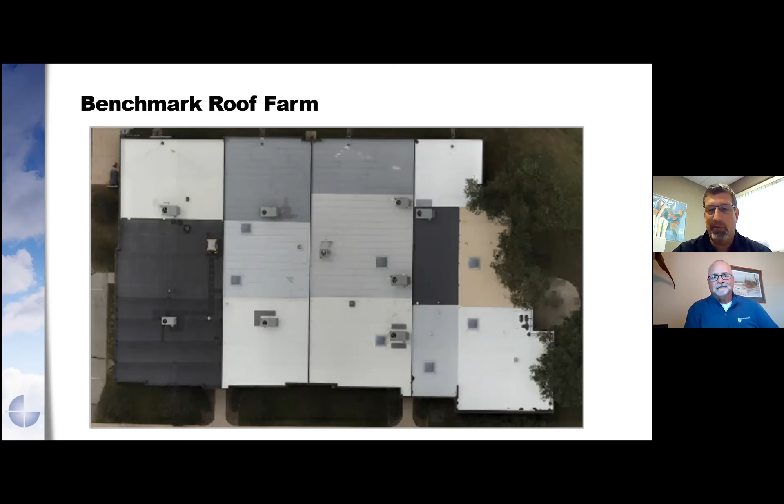So let's touch base on the webinar. We're going to focus on three things: identifying some gaps in your roof evaluation, design, and quality assurance programs for food processing facilities; strategies to justify repair and replacement budgets; and reducing risk through implementation of a roof management program. We'll share a case study, and then we'll have some Q&A.

Before we step forward, we're going to have our first poll question: have you experienced any unplanned and/or costly plant production disruptions due to roof issues? The poll question should have popped up on your screen—it's pretty simple, please answer yes or no. We'll give you a little bit of time to do that, and then we will close it and touch base on that a little bit.

So as we look at the results, almost 80% of you have had some sort of unplanned or costly plant production disruption. And that is a painful situation to be in, and not an uncommon one. We see it quite often, so hopefully we will provide some information today that can help you put plans in place to reduce the risk of those things happening.

As we work in this industry and read headlines in the morning, imagine tomorrow morning if you woke up and had a headline: leaky roof blamed for tainted product, contamination results in product recall, $160 million in lost sales and 30% reduction in stock price. Those are real headlines that have taken place in the industry. The impact the roof can have is tremendous, and we want to reduce that risk.

So the first thing we're going to take a look at is things taking place in the roofing industry that might have an impact on how you're managing your roofs and some of the outcomes. The roofing industry is a fairly large industry, a $150 billion industry. There's about 1 million workers and 55,000 contractors. I think the largest commercial roofing contractor today doesn't even make up 1% of the industry, so it's very fragmented. Some of the issues they're facing include supply chain, which is an issue you're all dealing with right now, impacting what materials we can get, what systems we can specify, and a lot of things in the roofing industry.

But the real big issues, I think, are the next three. Number one is worker shortages. We're seeing it across not just the roofing industry, but in this case the roofing industry is having a difficult time finding workers - not just workers with skills who know how to install and want to work in that industry. It's been a challenge for a long time. But when you look at many roofing crews, you see a lot of folks who have probably been doing it for a long time with a lot of experience and skills. Those people are starting to retire and go away, and there's a gap to fill.

Litigation. When you look at new construction or even an existing facility, the total cost of the roof on those buildings is small compared to everything else in place. But roofs account for 50 to 65% of all construction-related litigation. Huge issue, a lot of risk associated with roofs, but it's a small cost in many cases of construction.

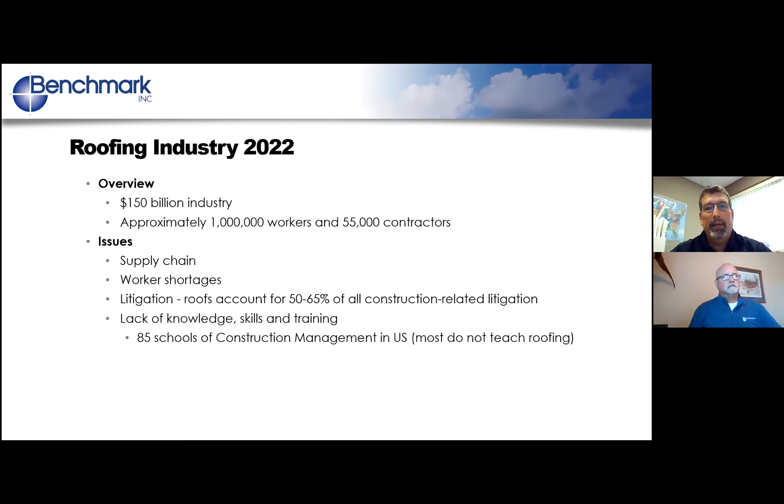So we shift from there and look at a study on roof failure. Let's talk briefly about a roof failure study. This was a study completed by RICOWI, the Roofing Industry Committee on Weather Issues. They looked at preventable and non-preventable failures when they studied these roof failures, and it's interesting when you break down the loss and the causes.

Workmanship, how the roof was installed, a preventable issue. Material, whether that's selection type or material failure, I'm not sure, but preventable. And then finally, maintenance related issues, a huge area that just gets overlooked. So it's amazing when you look at this, the majority of failures in this study could have been prevented had these areas been addressed initially during the process.

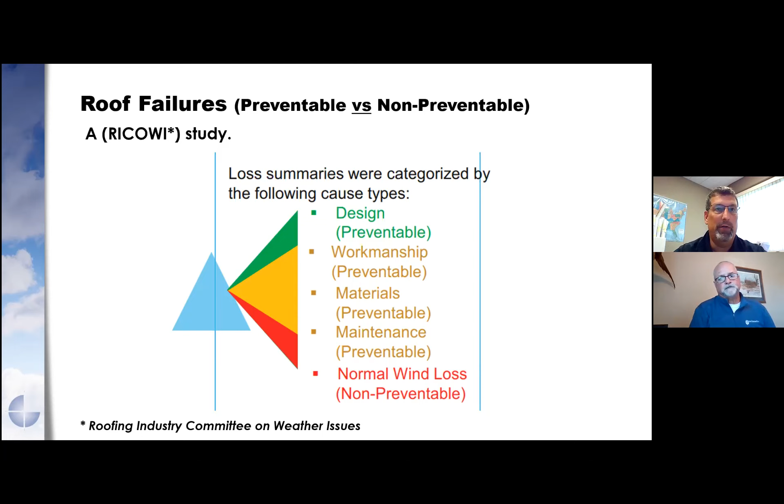So from that, we're going to go ahead and talk about food industry roofs. And as you think about roofs in general, they all face a lot of tough conditions. You know, we have wind, we have rain, hail, extreme temperatures. So it doesn't matter if you're a school or a food processing facility, all roofs have environmental conditions. But we do know the food processing industry and food industry in general has other issues you have to deal with. And I know Mike's going to make some comments. He'll jump in at some point here, but I know regulation issues create some challenges for food processing.

The activities below a roof. I'm sitting in an office building today, and I can go from my office down to the end of the building, and the conditions under the roof are not going to change. But when we start looking at the food industry, we have freezers, we have coolers, we have production areas, we have processing areas, we have warehouses, office space, conditioned, unconditioned. And so all those different activities below the roof impact how that roof is designed and how that roof is maintained. So tremendous difference in how you look at food processing roofs versus many roofs out there.

You know, if I might, Eric, I think these are really a couple of the key components here. The USDA and FDA 1997 laws really had some impact on the definition of freezers, coolers, production, and it's based on the size of the space as well as the temperatures that those areas are maintained at. So it's kind of interesting as we look at it from a roofing perspective, what happens beneath that roof area, be it a freezer or a cooler in particular, those temperatures impact how we deal with the roofing systems and the design. And we'll talk a little bit more about that later in the presentation.

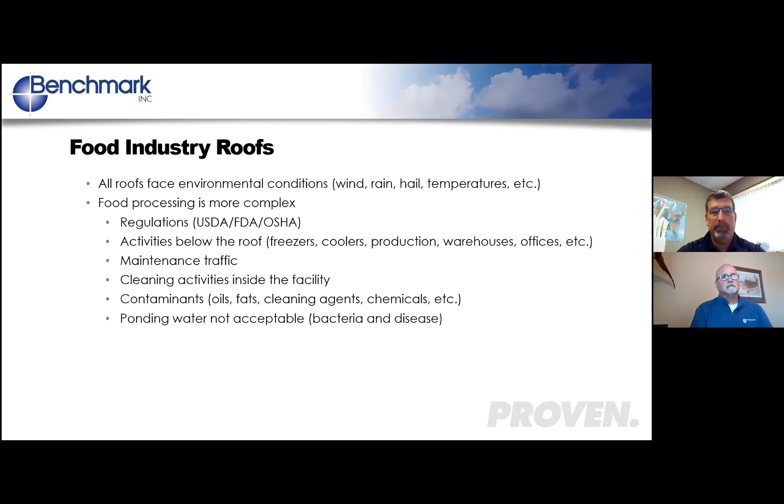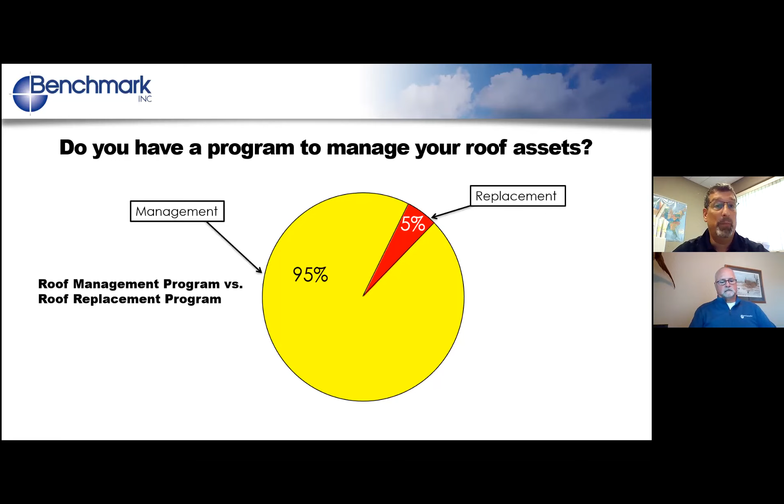But what can happen is the remaining 95% of these roofs, whether you have a replacement program or a roof management program. If we forget about the remaining 95% and don't look at repairs and maintenance or coatings or other options, we forget about the largest part of our asset. And it can create some real challenges that are very costly. And we'll see where your 5% replacement, if we don't address the other 95%, could become 6%, 7%, or 10% replacement, because those other 95% are no longer lasting 20 years and they start pushing into that replacement area. So we'll take a look at that as we go forward.

So as we think about a program, we think there are 9 areas that would make sense to evaluate and consider. And for us, it starts with goals. Do you have a goal for your roof management program? And what is that? Because when you establish the goal and understand what that is, it allows you to build the rest of the program to accomplish those goals. And we'll talk about some of those goals in just a second. Corporate guidelines. Do you have some corporate guidelines or standards that impact roof design, roof maintenance, or even quality assurance of roofs being installed? So understanding what your corporate guidelines are and developing those.

Then we start getting into a roof inventory and condition assessment. As you look at your facility or your portfolio of roofs, do you have an inventory of all your assets, and do you know the condition of those assets? Do you have that now? Number 4, a 5-year plan. We tend to think in 5-year plans. We've looked at some that are 10 years, but generally we have a pretty good idea of the progression of roofs over 5 years. When we start getting out to 10 years, it gets a little bit harder to look at performance because a lot of things can impact that. But do you have a 5-year plan that addresses repairs, maintenance, coatings, recovers, or replacements?

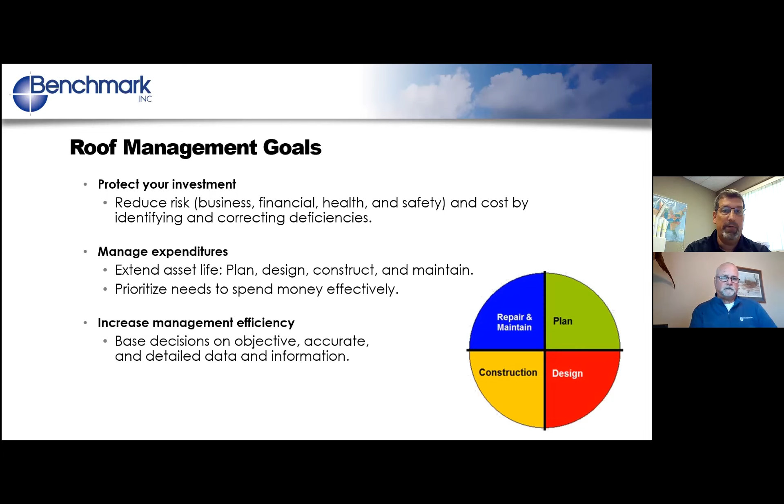So that's in big picture how we think about it. But it's really important in our mind to sit down with individuals and talk through, what do these goals look like for you? Because they can be different for each company. So as we jump into the planning phase, it starts with knowing the condition of your assets, so you can manage risk and cost, and you look at completing an inventory assessment. This allows you to prioritize budgets and ultimately take action.

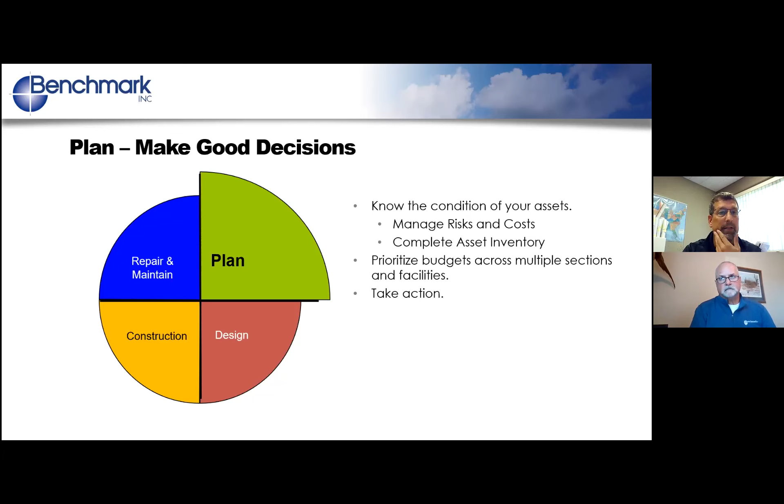So let's dig into this a little deeper. We've talked a lot about data and information. And one of the things that gets a lot of attention today, and we have a lot of clients talking about this, is the use of UAVs or drones. It's kind of a hot topic right now. And I want to talk just a little bit about this as it relates to collecting data and turning that into information that you can use.

Benchmark's been involved with UAVs for probably 6 years. We outsourced for the first 4.5, 5 years. About a year and a half ago, we purchased our own system and trained our own pilots. So we have roof consultants that are pilots flying these drones. And some things I just want to make you aware of as you consider these. You've got to get the right data for both infrared moisture scans and for RGB, just think standard images. Do you have the right systems and processes where you can collect that data accurately?

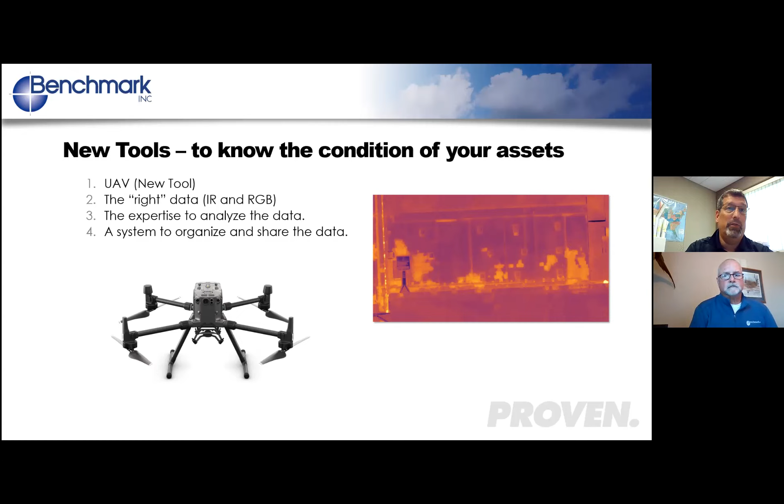Because, we can start looking at return on investment on these things, and how you get that done. But it's really important when you think about it - it's simply let's extend the life of that asset, and it's repair and maintenance that quite often will result in that.

Mike, did you have a comment on that? I do. It's interesting, Eric, that the studies NRCA has done show two factors that are probably the most critical: first, initial design, making sure you've got the design in place that incorporates materials appropriate for those roof areas impacted on your facilities. The second is that repair and maintenance piece. It's incredible the return on investment when you do a life cycle cost analysis of what the repairs and maintenance can do.

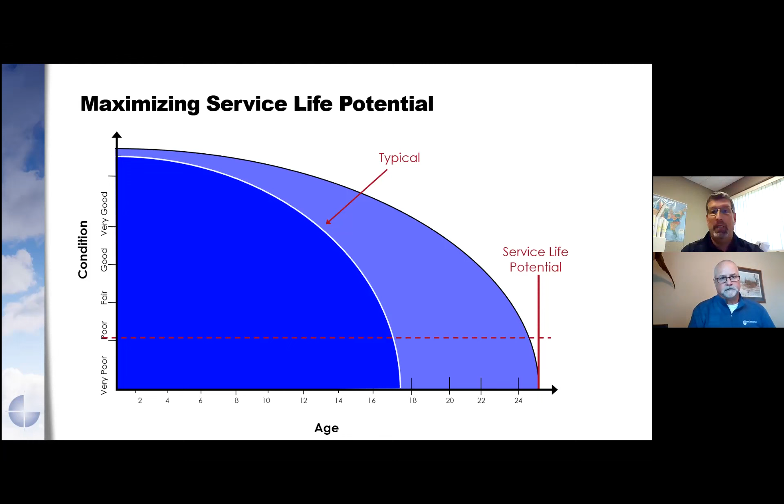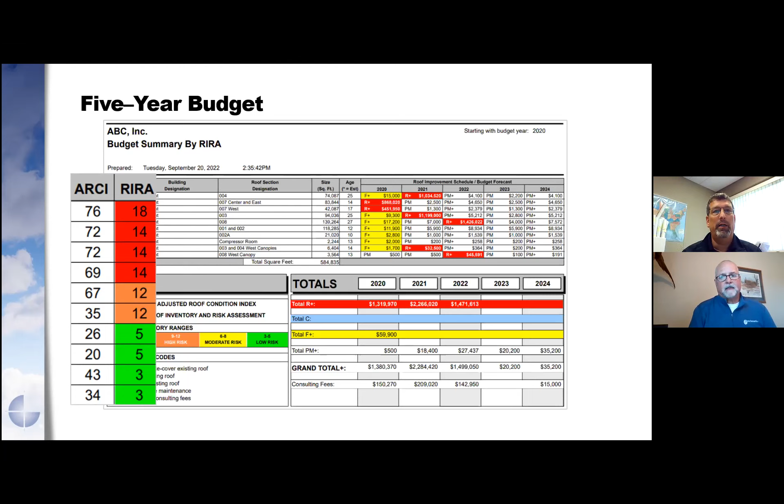But then we step over to the RIRA, which is a risk factor. It's simply red is worse, orange is a little bit better, green is good, as we look at the risk or sensitivity to moisture inside that facility. So again, when you think production area versus office, there's a higher risk of water entering a production area than an office area.

Eric, one of the interesting things with regard to food processing plants - I've got three clients we're working with - is how they approach the roof condition index versus RIRA. The roof condition index, folks, keep in mind, really is the condition of the asset above the deck. What happens below the deck is that risk piece. And it's interesting to me that of the food processing clients we're working with, how they even approach that risk factor a little bit differently.

For example, a production line, if it's beneath the roof area, is very obviously very high priority and very high risk if in fact you do have leaks that shut that line down. Whereas if you look at even a warehouse, a cold storage facility of the food processing plant, interestingly still a very high risk, but not quite as high as that production area. So you may find those falling into that orange or 12 range and so on.

Why I think this is important, folks, is that you'll have an opportunity to really evaluate - from the function beneath that roof area - it really holds a higher weight and priority based on that risk.

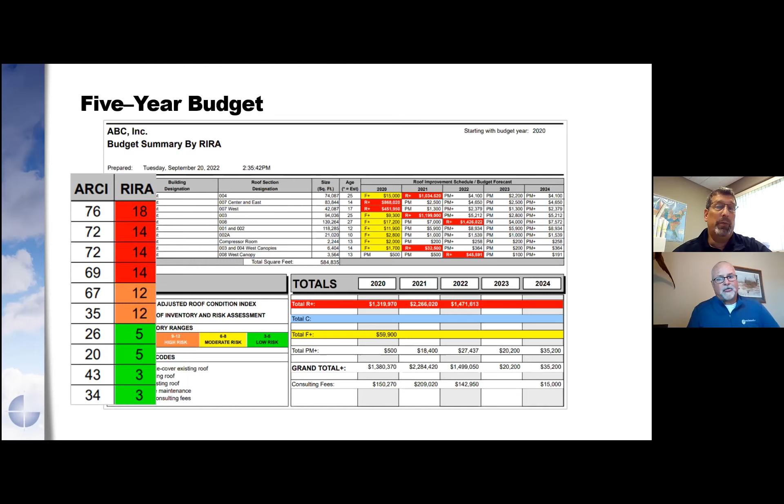As you look at the column with the yellow F, those are repair expenses, and they're $60,000. So if your budget is $35,000 for repairs, RIRA helps you determine where you spend those first $35,000, because if a roof falls under risk of green, you're probably going to focus on red and orange areas first with the first dollars you can spend.

The same goes for replacement. If you have multiple replacements that fall in the same year and you can't get the capital to replace them all, you'll probably treat some with emergency repairs, but those that are high risk would go to the top of the list as you look for funding for replacement.

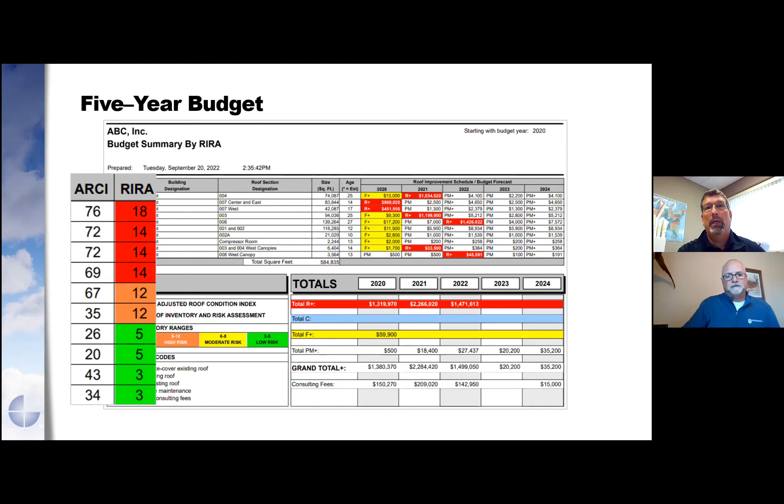It does help build the case for justifying funding when you can associate risk with condition. Exactly. And so the last slide shows, in this case, there's about $5 million in replacement, $60,000 in repairs. If those repairs are not done, the $5 million in replacement may change to $7 million or $10 million 2 and 3 years down the line.

It does help you build the case for why it's important to get those expense funds, but sometimes that can be difficult depending on how your funding structures are set up. If corporate makes all the decisions on capital and expense, it's a little easier, but sometimes corporate handles capital and the facility handles expense. At least having some insight into what happens if we don't spend this money on repair and maintenance helps, because it will impact our capital budget down the line.

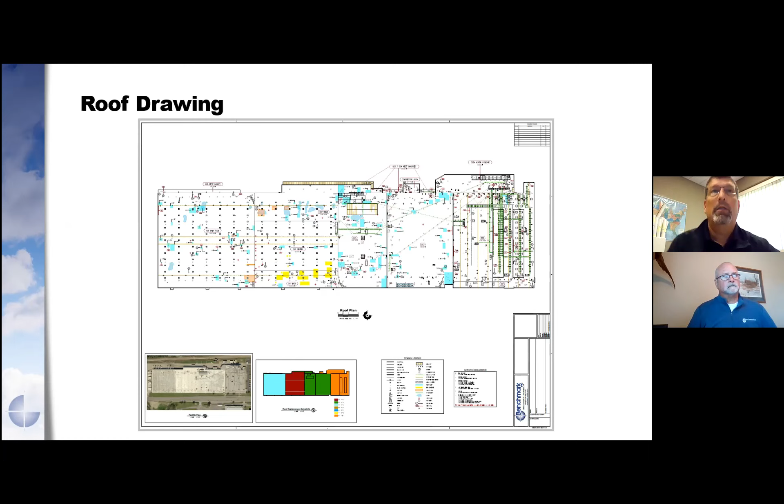It is an opportunity, when you have this information, to make some business decisions on what to do. The goal might be to take those roofs that are 6 to 10 years and shrink that from 72% down to 40%. Can we do that with aggressive repairs and maintenance? Can we do that through coatings? Can we do that through recovers? What options do we have to shrink that 6 to 10 year replacement down?

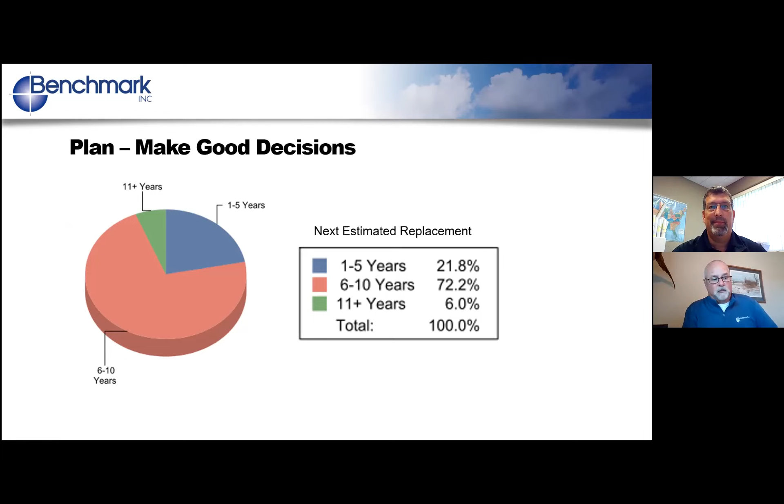So it's critical—and I'll talk a little more about this in a moment—the type of roof membrane and system you specify based on what those emissions are. That's really what we're going to look at, because if you choose the wrong system based on the emissions your plants are producing, you're going to significantly reduce the service life of that roof. Thanks, Mike.

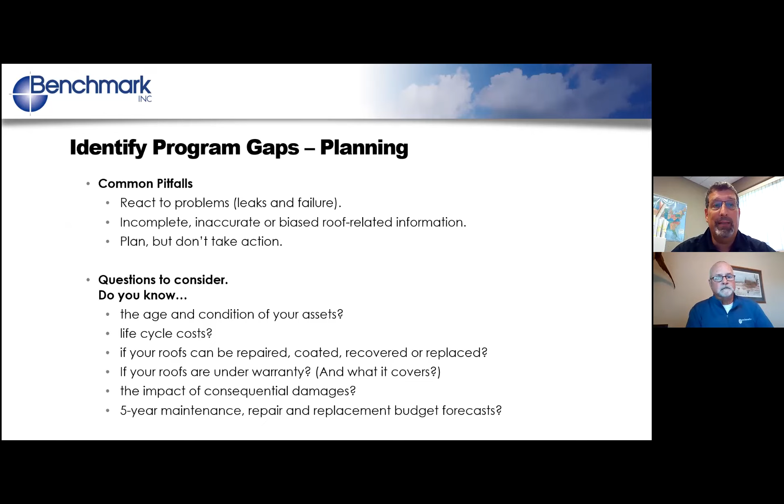So we're going to shift from the planning phase into—I'll give a quick recap on planning, sorry. We see some of the pitfalls are reacting to leaks and failure versus being proactive, having incomplete or inaccurate information to base decisions on, and planning but not taking action. I'm not going to get through the rest of those.

We're going to jump on to the next phase, and this gets into the design phase. Mike, why don't you go ahead and talk through some of this?

You bet. So what we're really looking at, the second piece of the pie here, is design, specific design criteria. We could have a 2-day seminar on this, so I'll go through it fairly quickly, touching on high points: evaluating the options available, approved contractors, materials, the bid aspects of design with detailed plans and specs. Accurate bidding reduces cost and time frame, and then budgeting and bundling regional projects. Eric talked about that earlier, the opportunities to economize.

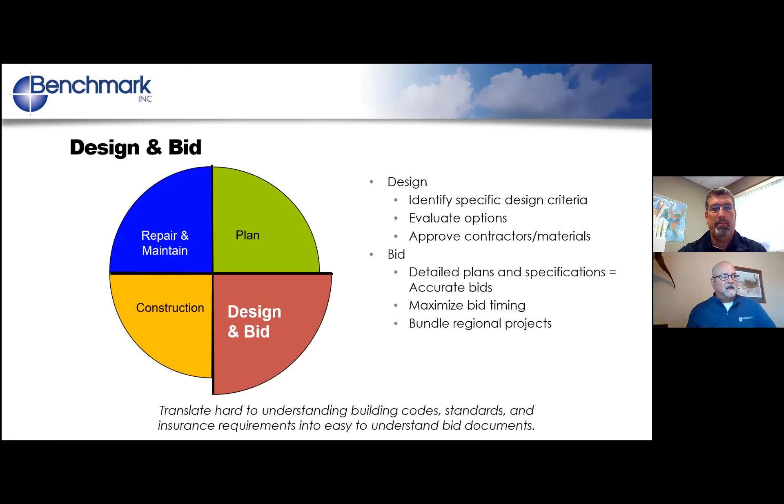So we want to look at some building codes. Part of design is talking about criteria, building codes. First and foremost, I'll highlight a few of these: occupancy considerations, environmental considerations, the sustainability aspect - are you putting solar on your roof?

Looking at substrates. One of the most impactful design criteria is insurance considerations. Many of our clients, and possibly many of you, are FM Global or Global Risk Consultants insured. FM Global is kind of the gold standard the industry follows, with very specific criteria regarding roof design based on those insurance requirements - the roof use, trafficability, slope, all of that.

And then constructability considerations. One thing we've learned about food manufacturing plants is that these are dynamic environments. You're very often changing what happens beneath these roof areas, and installing new equipment on the roof side. So we've got to consider these as constructability issues.

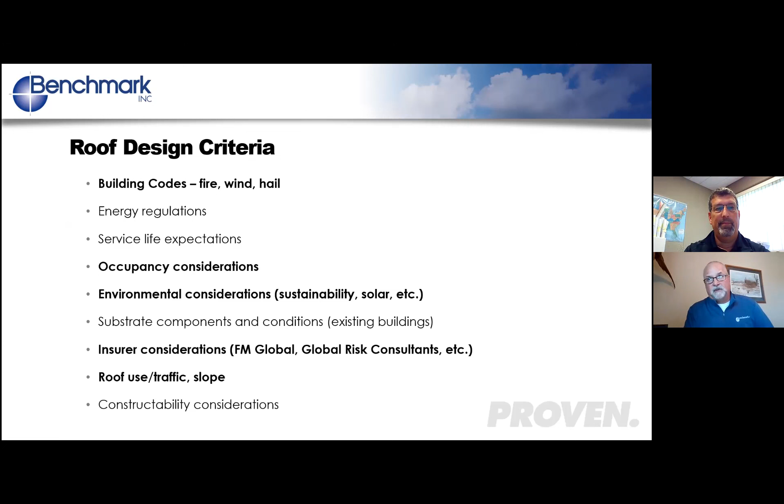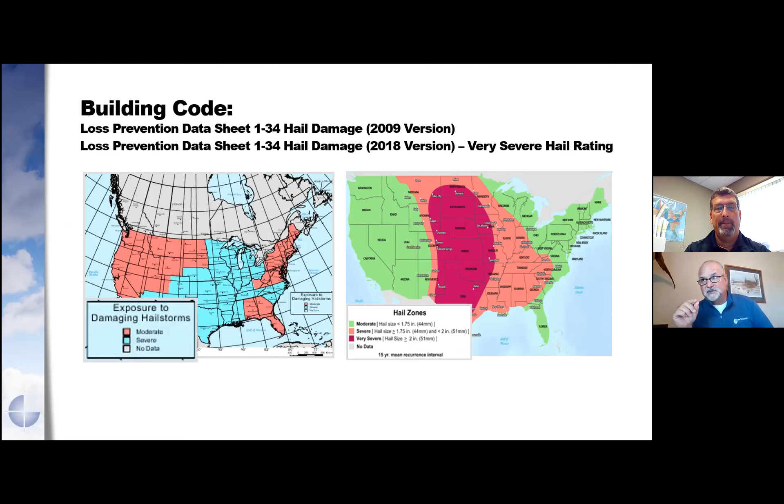Looking at code requirements for loss prevention data - specifically hail - this has really changed since 2009. For example, the left chart shows where severe hail lies versus 2018, where the band or area of the United States now considered very severe hail rating has changed. That impacts your design in that we've got to have beefier systems, more components that meet that severe hail rating. So building codes vary by region.

Looking at codes for freezer and high humidity occupancies: refrigerated buildings tend to have a strong outside-to-inside vapor drive, requiring an intense concentration of perimeter vapor seals. But on refrigerated buildings, you've also got considerations of adjacent functions and occupancies that may have air movement between walls - I mentioned this earlier, between firewalls within the interior of food processing plants. So we need to take that air movement into consideration.

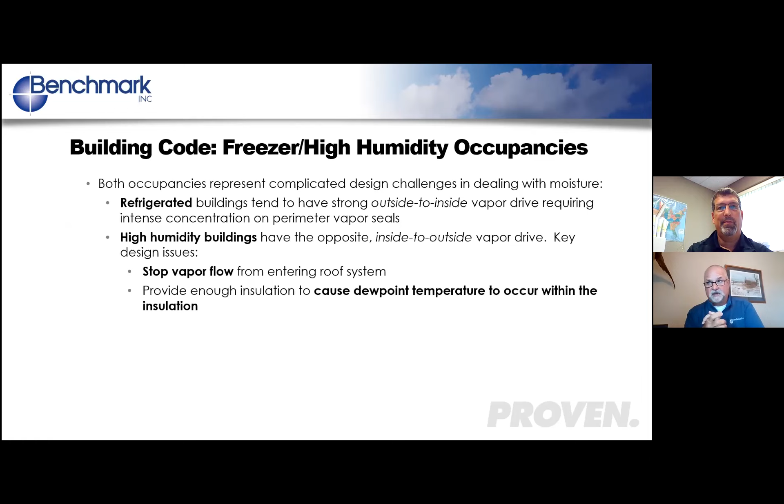High humidity buildings have the opposite, inside-to-out vapor drive. Interestingly, with food processing, as you're cleaning equipment during monthly maintenance, you're using hot water, and that creates humidity, so the vapor drive goes this way. The key within the design is to stop that vapor flow from entering the roof system. We've got to figure out where the dew point is within the system, and that's based on environmental conditions and where your plants are located. All of that needs to be factored in.

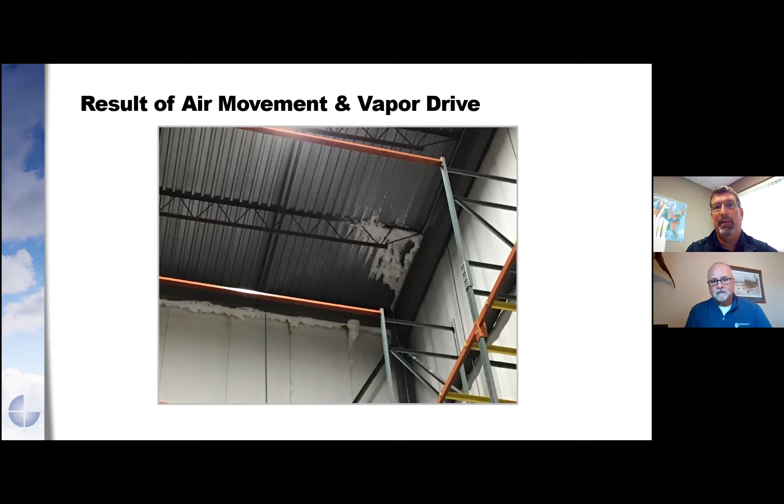This isn't unusual to see at many plants, because quite often the vapor retarder or vapor barrier isn't considered - it's just considered a roofing project versus thinking about the conditions inside and how that will impact the design.

One of the bigger considerations, Eric, is very often, as I've mentioned with food processing manufacturers we work with, the dynamic environment changes - production may expand, and you go into an adjacent space thinking the roof above it has a vapor seal. More often than not, it doesn't. But you've also got to consider that wall exposure and air movement.

Sustainability, that's a hot topic in our industry currently. Sustainable design begins with designing the roof to last as long as possible, right out of the get-go. Instead of using lower quality materials, think of sustainability for the long term. If we can keep stuff out of the landfills, that's our ultimate goal. Reuse, repurpose, and recycling opportunities are really coming to the forefront with many companies that we're working with.

Currently, one of our food manufacturing clients is utilizing their post-packaging waste to go into a roof cover board, a hard board utilized for hail resistivity, for example.

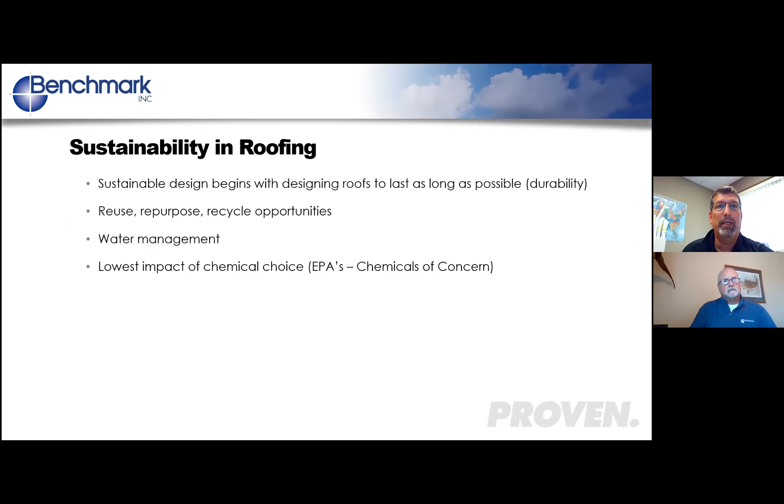So really, when you want to look at recycling, it goes back to the first point—sustainability begins with roofs that perform long-term, where you can coat them, recover them, and do everything you can so you don't have to tear them off and work on recycling. But recycling really comes down to the specific project, the system in place that needs to be torn off, and then looking for regional options to address that.

Quickly, the last couple of slides here in design—ponding water. We talked about sustainability and water management; roofs may be designed to hold water. That's all well and good, but we've also got to consider drainage and ponding. Obviously, ponding water has contaminants, and we've got to avoid that.

Risk management is the end of the design. We can mitigate risk in our design. And again, the opportunities to bundle—those are some opportunities that are often overlooked.

Thanks, Mike. Let's go ahead and jump into the construction phase. We think there's a tremendous opportunity here. When you look at the quote, you get what you inspect. We believe it's important to ensure that if you have a sound specification, you inspect to make sure it's installed as specified. And we think that starts with conducting a pre-construction meeting with all the parties involved, so everybody understands what needs to be done, then having some sort of on-site quality assurance, and finally a project closeout.

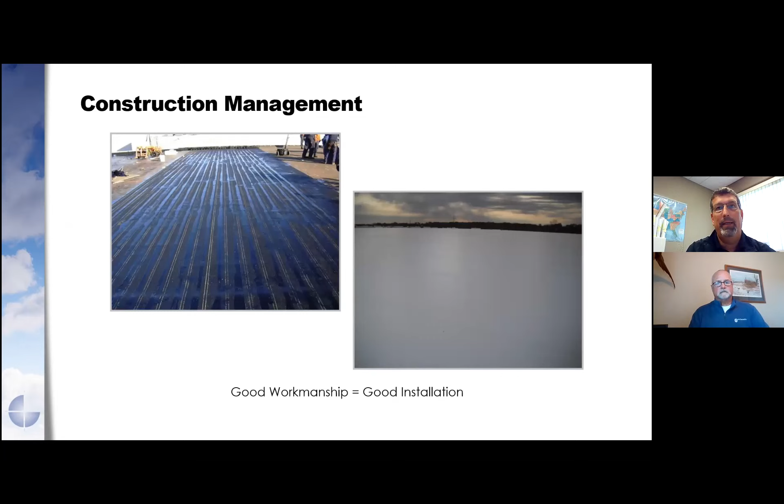And then finally, good workmanship equals good installation. You can see the left picture—it's a beautiful looking roof that's been laid down, and the one on the right as well. If you have good workmanship, if you can verify it's installed as specified, that's going to result in good installation and long-term performance. This is just one example of hundreds that we have.

And these are the things that we see on roofs over and over during installations that we need to look out for, and make sure you understand what the specification is actually calling for. So construction observation, this is a quote from the Manual of Built-Up Roofing Systems: rigorous inspection is the strongest line of defense against poor quality work. It's important to inspect the work being done.

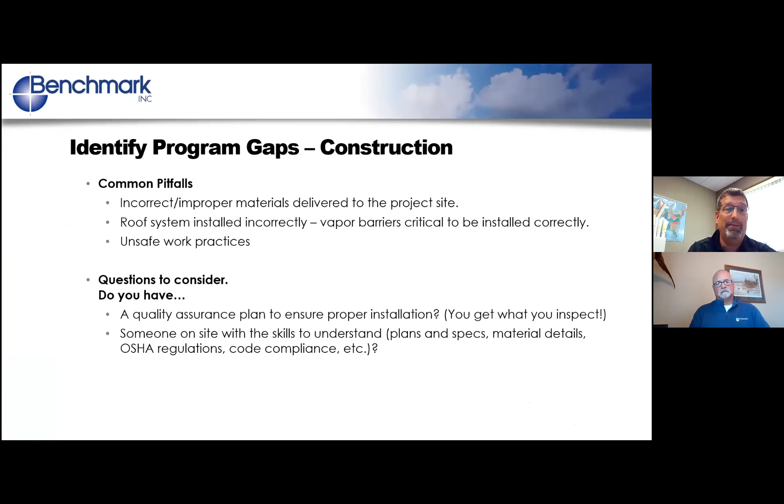So let's go ahead and jump into some of the gaps. We see incorrect or improper materials delivered to project sites. You need to be able to verify what's coming on site. And we see roof systems installed incorrectly. And finally, unsafe work practices. So you need to keep that in mind as you're looking at a program.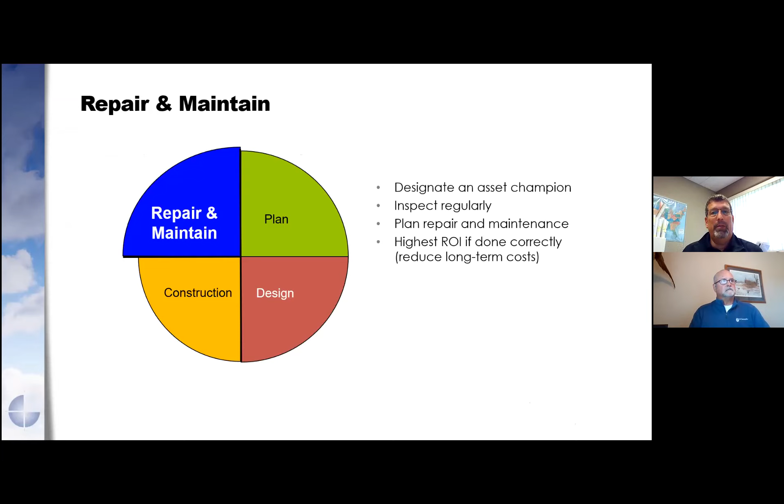The last piece we're looking at, repair and maintenance. And I would jump to the main point on this. If someone does not own repair and maintenance at your company, it likely won't happen. And you have to have regular inspections of work being done and your roof systems. It does provide the highest return on investment of just about anything you can do to extend the life of your roofs.

The last piece on repair and maintenance: they just don't get completed. It's amazing the number of times that they just don't get completed. And then when repairs do get completed, make sure you're doing the appropriate repair for the remaining service life of that roof. If that roof's going to last another 15 years, you better do a 15-year repair. Don't do a 2-year repair on a 15-year roof. And then make sure you're using the right repair materials, because if you use incorrect materials, it can damage and create further problems.

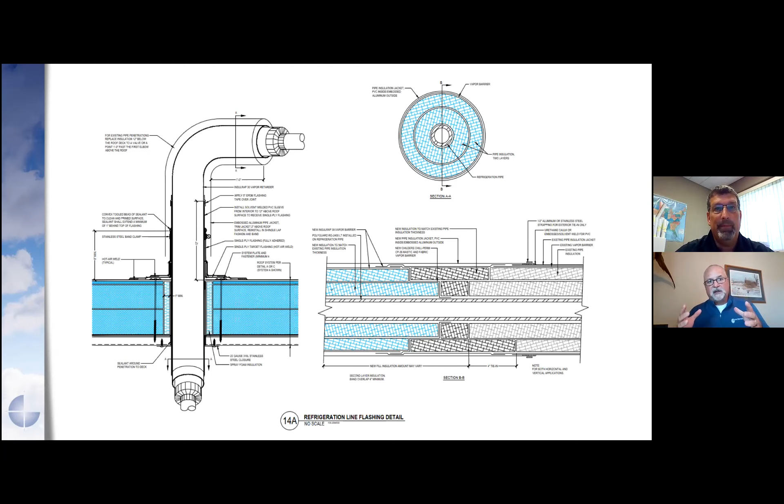Yeah, particularly with these refrigeration lines, folks, you got to remember that these things are chilled, and if that exterior wrapping or insulation of these pipes becomes compromised, then you've got a vapor drive issue. So it's critical that these components are inspected periodically to make sure that the entire assembly is functioning as it should.

Thanks, Mike. I'm going to jump into some questions since we just have a couple minutes left, Mike. And I think I'm going to combine these two questions. One was related to what membrane do you recommend on food processing facilities, and what membranes are best suited for emissions? If you can answer that real briefly, Mike.

You bet. So again, guys, one system does not fit all. We've got to understand what emissions are happening on your plants. We typically involve the membrane manufacturers. They would come out, do sampling, and determine what those chemicals are and what the best material would be for those roof areas. Thanks, Mike. There's not a one size fits all, bottom line.

Yeah, I'll jump through a couple more of these. What are we seeing for prices for roof systems today? We are seeing tremendous price increases over the last 2 years. We just looked at a project the other day. It was a 140% increase in price over 2 years. A roof that we had seen at $20 to $25 a square foot may be coming in at $60 a square foot today.